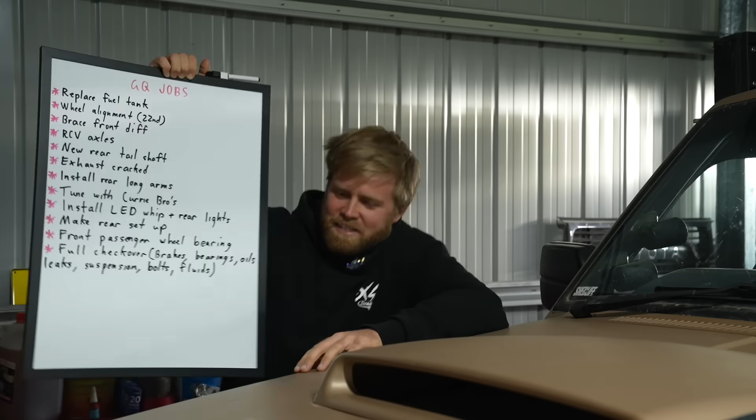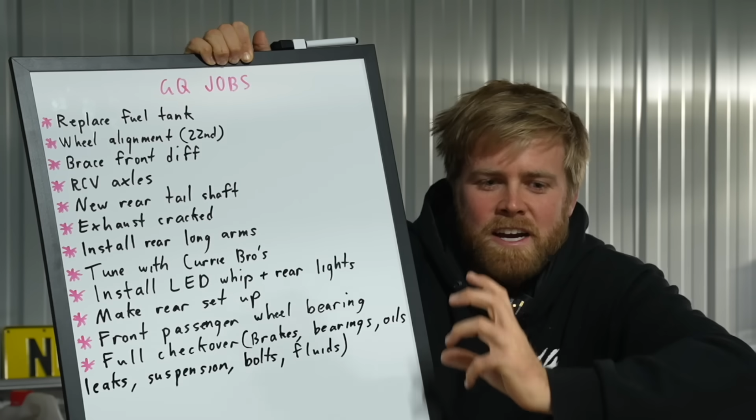We're taking this vehicle to Cape York, the top of Australia. It's maybe about an 8,000 kilometre round trip. We've got a lot of work to do to get this thing ready, so we've got ourselves a big list here. Some of it is fixing from our previous adventure, like a busted rear fuel tank and a busted rear tail shaft. It requires a fair bit of servicing. And then we're doing some really exciting new mods as we're always improving and making this thing better, more capable, four-wheel drive for adventure. So let's jump into it.

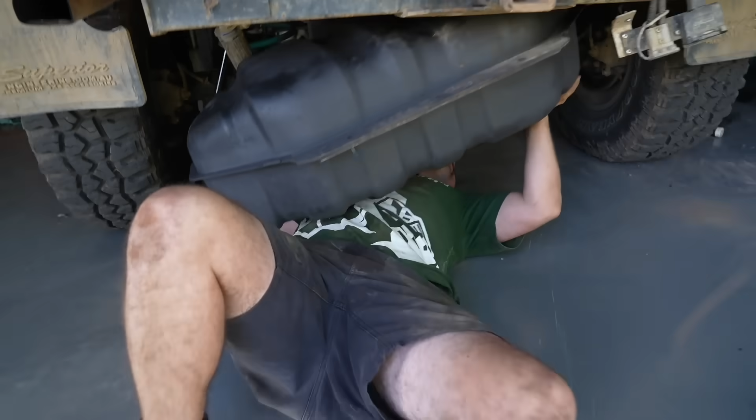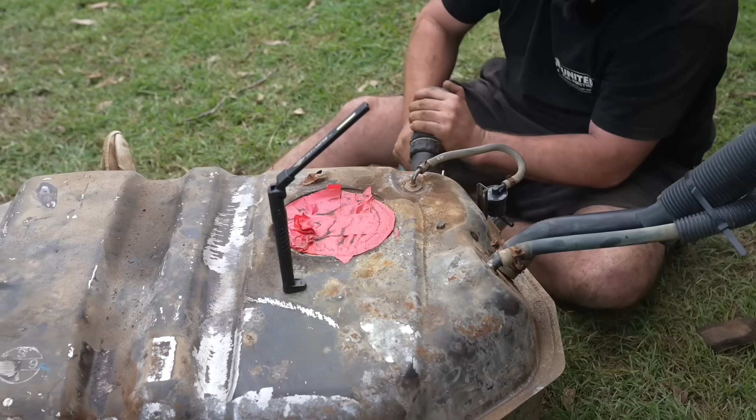First job we're doing, top of the list, is this leaking fuel tank. This actually started on our Central Australia trip, maybe about 9-10 months ago now. We said, look, we really need to get this fixed because it keeps reoccurring on trips - we keep patching it up and then the leak just gets bigger and blows itself out in a new hole. So I said, look, we've got to get a new tank. When I say new tank, I mean this rusty pile of shit that's there.

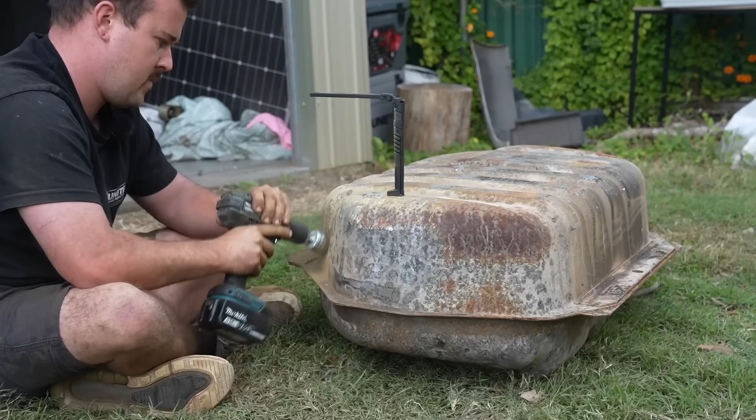This came out of that blue GU I had, which I got that spare TD42 out of. We pulled the tank out of that, but the tank's all pretty good - we checked all inside and it's beautiful inside. It's just got a bit of surface rust on the outside of it. So we're going to wire wheel it back, maybe put a bit of rust converter on it, paint it up, make it look nice, go to that little bit of effort, and then we'll whack that in the GQ and she'll have a new fuel tank.

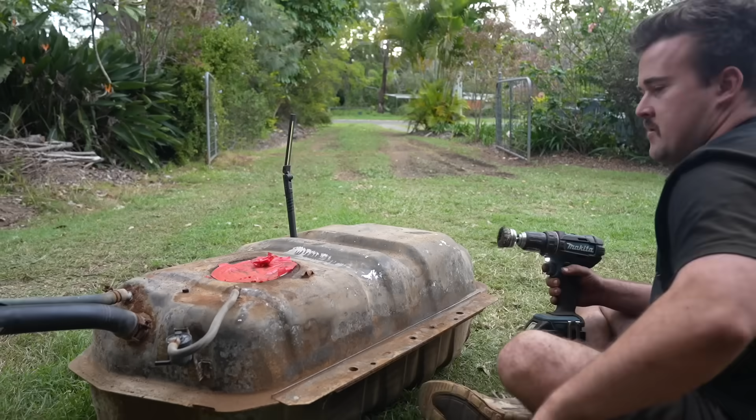We should actually say too, it's actually night time at the moment, but we got the Ultimate 9 torch out here, so it just lit up the whole neighbourhood. Yeah, mate, see how bright it is? It's not even on.

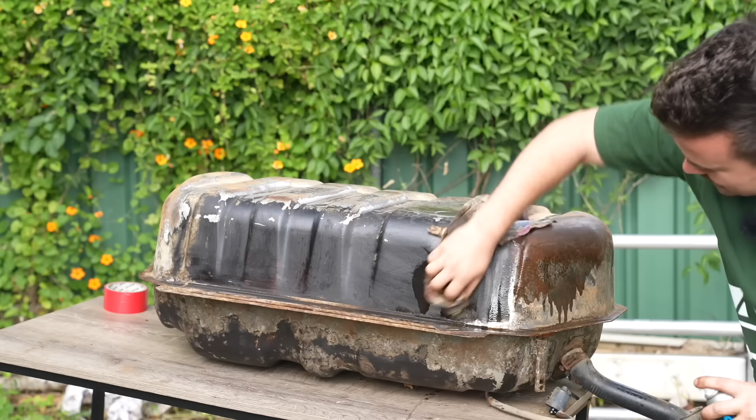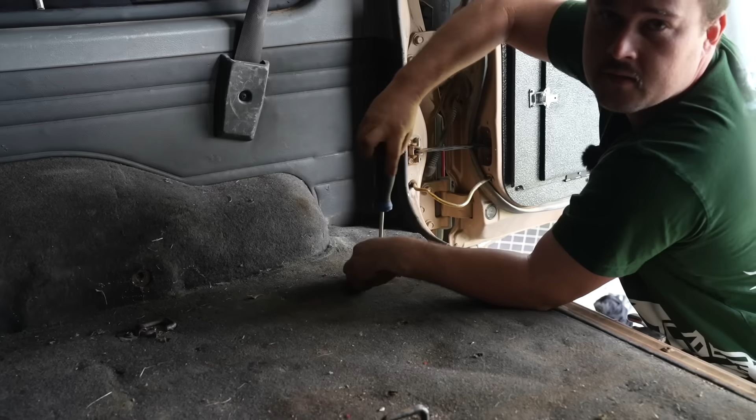The tank's painted. While we're waiting for it to dry, I'm going to rip up the back carpet, get into the top inspection hole, take the hoses off, and we'll drop the tank out. Nothing too complicated then. Nah, even you could do this.

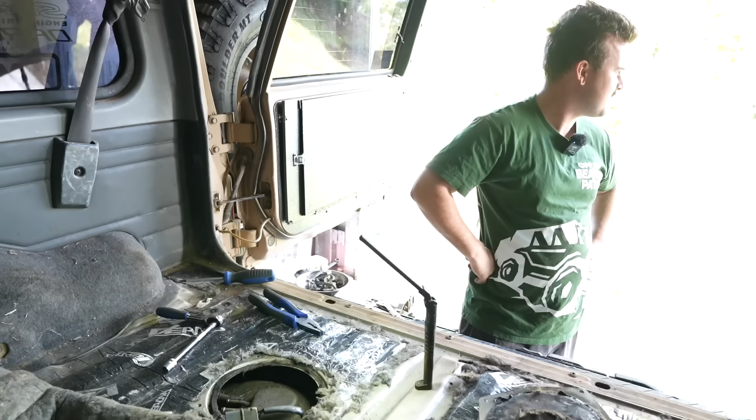Maybe, don't know. Look what I found under your carpet. This is my personal - no, yours, mate. Yeah, mate, it's just the usual, you're leaving your tools all over the countryside. Better than leaving your tools, isn't it? Yeah, well that's what you normally do. What do you reckon, full tank of diesel in there for you to sort out? Well, how much did you put in it today? I filled her up, mate. Maybe, so I seen the gauge. No, I don't know what - it's under a quarter.

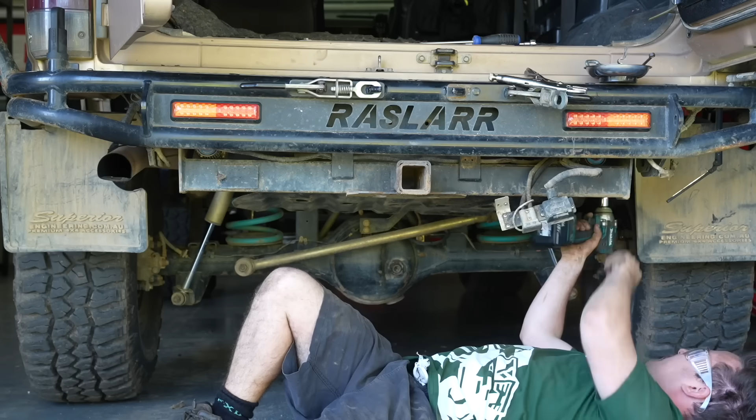Look at that, so that's the old fuel tank out. Now what? I'll probably change your sender thing, pull the hoses off it, and then I'll throw it outside to sit in the rain for the next 6 years. Perfect.

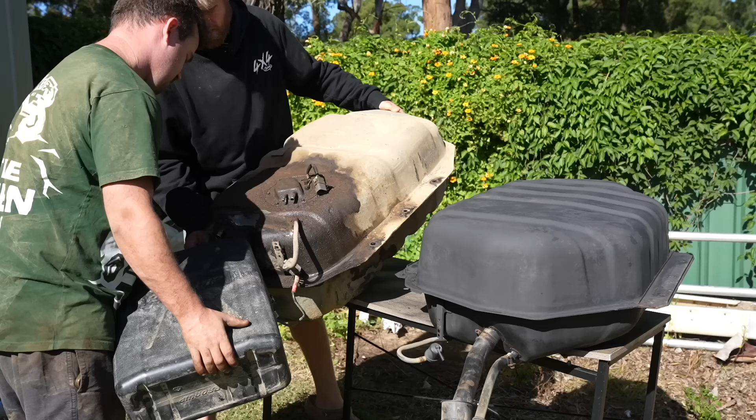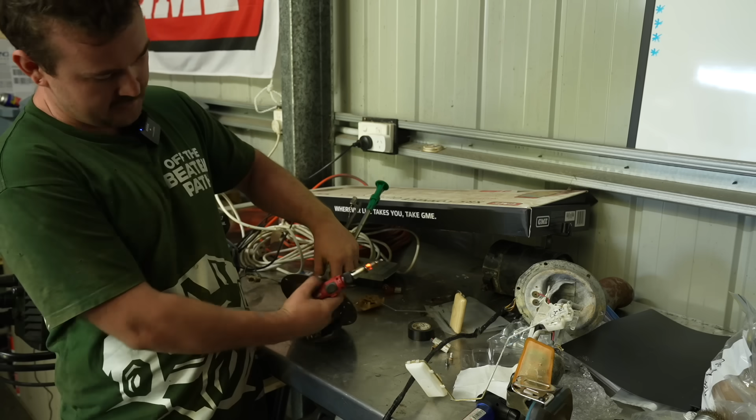What I'm doing here is I'm changing this fuel sender from this one, I know it's good, onto this one. It's got one screw and then this little sender comes off, but then the wire is soldered to a little thing, like a pass-through bulkhead. So I just melt the solder, pull the wire out, do the same for that, switch them and then re-solder it on.

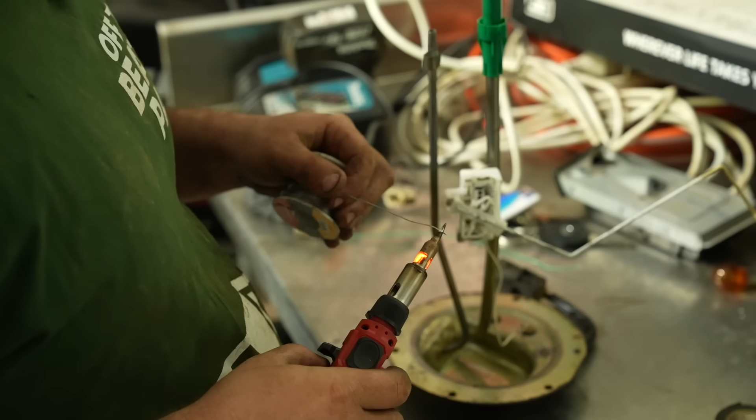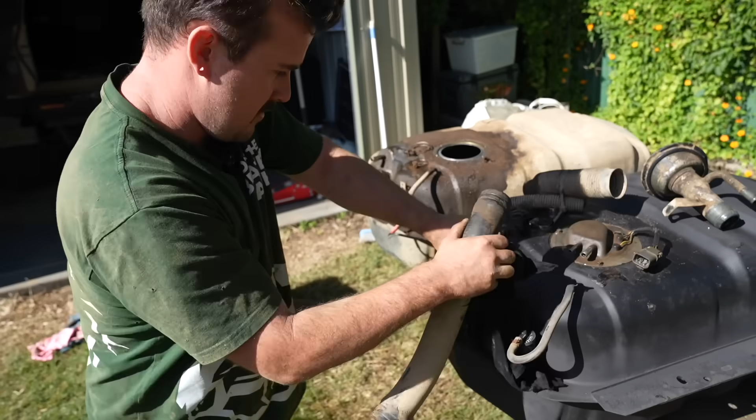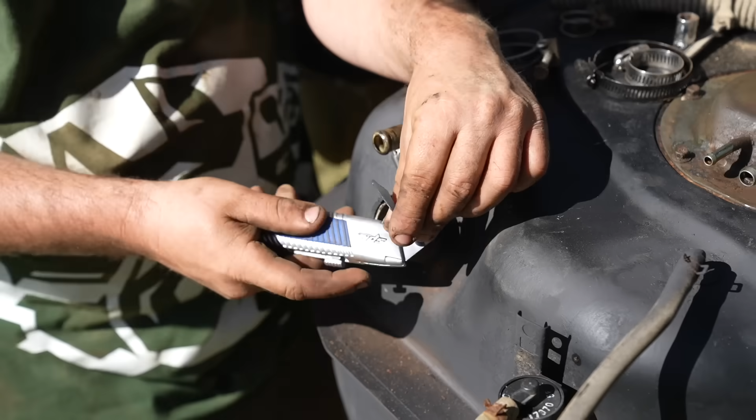We've got a slight problem - this is littler than that, but I had an idea. I thought, hey, what if I cut a piece of the little hose, slide it on, get him on there, and then big hose, boom - problem solved. I'll double clamp that to be sure, but that's a tight fit, a snug fit. We're not playing around, not today. So I reckon what I'll do is trim this around real flush so it's not gonna just hit it.

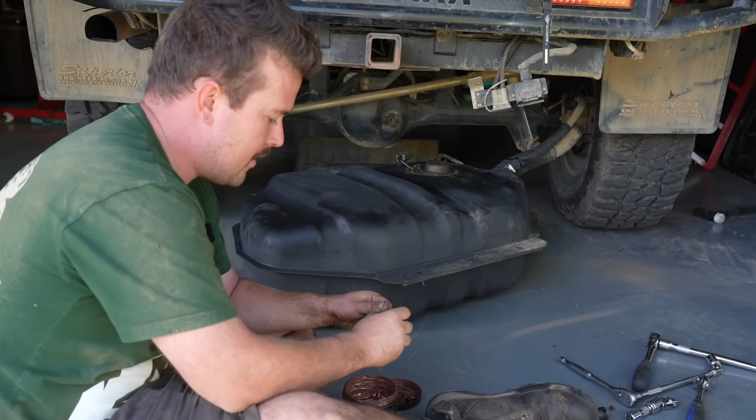What are we doing here, bud? This is called anti-seize, mate, copper ease. I don't want these, when it leaks again and you drive like a maniac and pick really bad lines, I don't want to be struggling with dirty bolts. Man, I can't wait to outdrive you on every Cape York track. Yeah, well that'll be your first. So I'd probably even let you have it.

So the new fuel tank's all set up, ready to go. We just got to lift her in now, re-bolt her up, and that'll be the fuel tank job done. Don't tell them it's that easy - slow down, everyone will be doing it themselves. You'll put mechanics out of business.

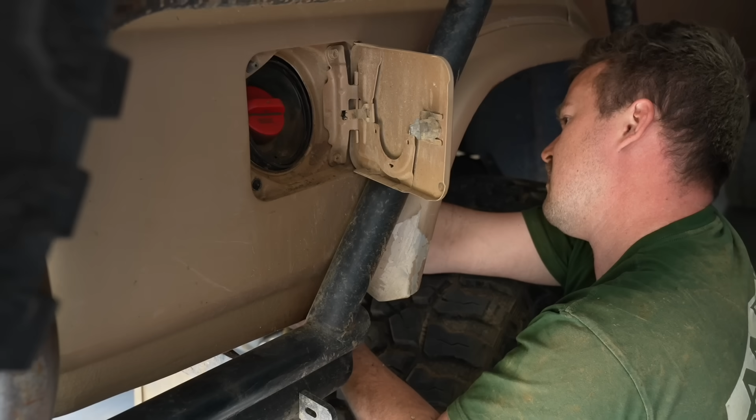Just putting the splash guard in. Mine doesn't even have this, mate. Yeah, my car's twice as good as yours.

Fuel tank's in. Going to turn the key on, make sure the gauge and everything works. Says we've got just under a quarter of a tank. It's probably about what we put in it, so. Beautiful.

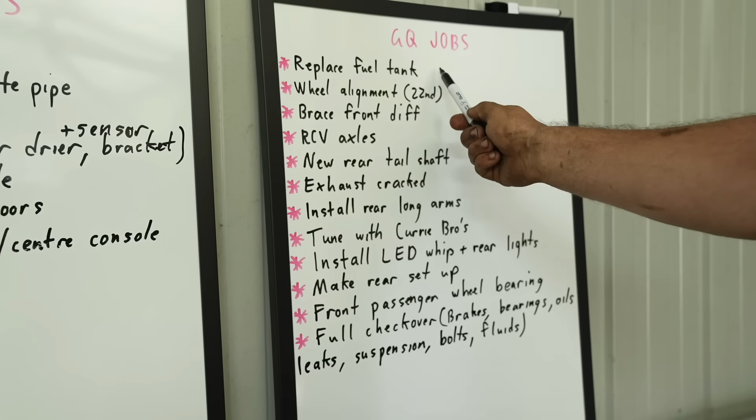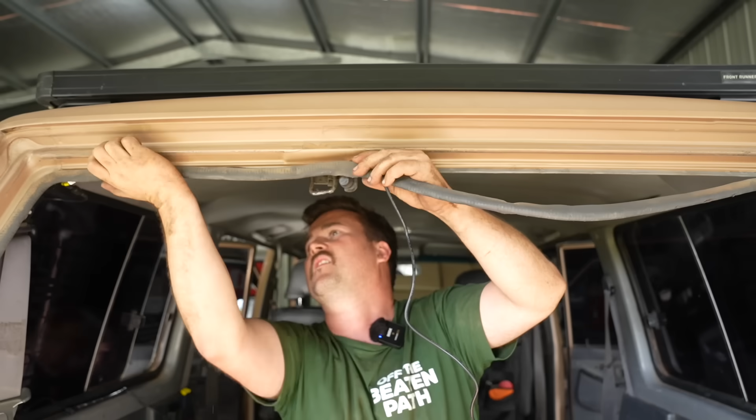With the fuel tank all done, the next job to quickly do and tick off the list was the new LED whip and interior lighting from EcoX Gear. I don't have any camp lighting inside the GQ and have been wanting some for a while. I've already got the speaker from EcoX Gear, so figured I'd just join their lighting up to it as well, and then it can all connect together in one system.

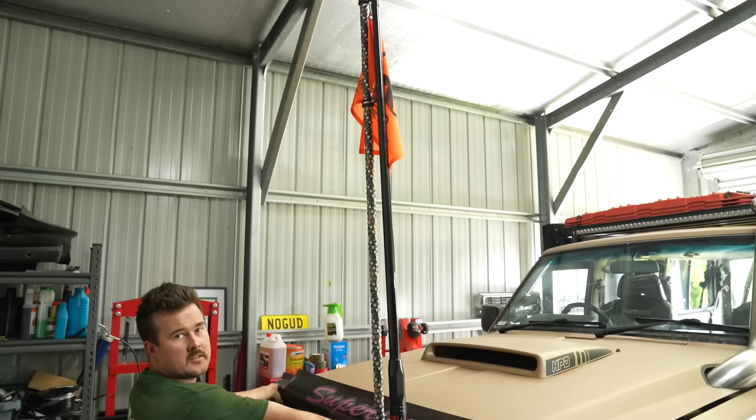That's her, mate, all installed. How'd it come out? Oh mate, it's my finest work. I've never seen something so good. A little slap together for Cape York lighting. So that's LED whip and rear lights done.

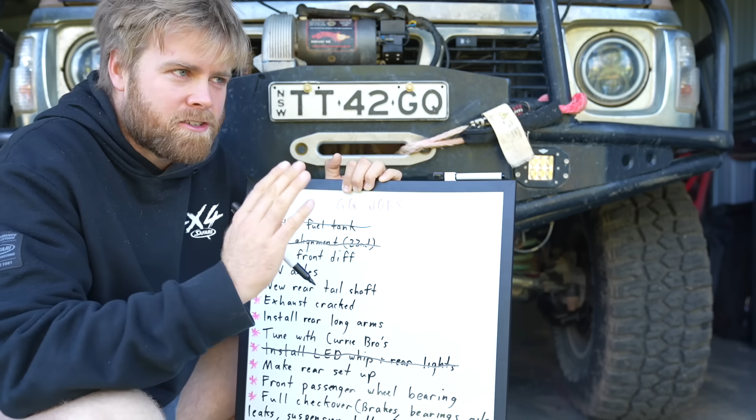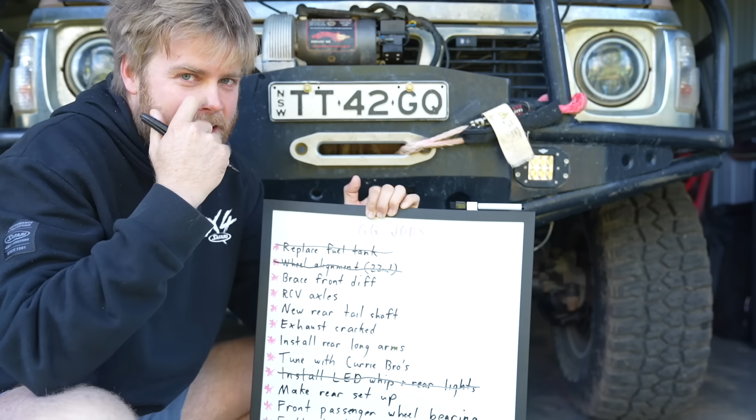This morning I've just taken the GQ down to get a wheel alignment, so that's been done. One of the things I wanted them to do was check the front diff is not bent, because once it's on the wheel alignment machine you can check your caster, your camber and stuff and make sure it's not doing anything weird. On the last trip, coming up out of Ali Bubba's cave, I tried to launch it up a step. It hit a double step at once and bounced the front end, big compression down, and busted out an axle seal. We were concerned that it maybe slightly bent the front diff, but it seems all good, which is good news.

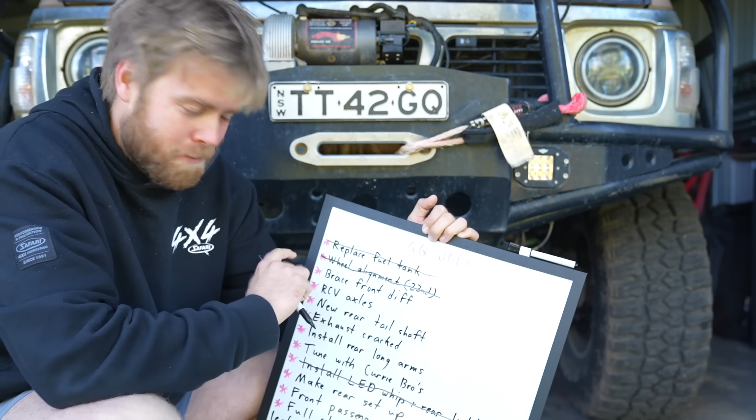So I don't have to get a new GU front diff, and that means we can now brace it, put my RCV axles in. Before we get into this front diff though, Berto's under there now pulling out the rear tail shaft, which got destroyed on the last trip, also on Ali Baba's cave track.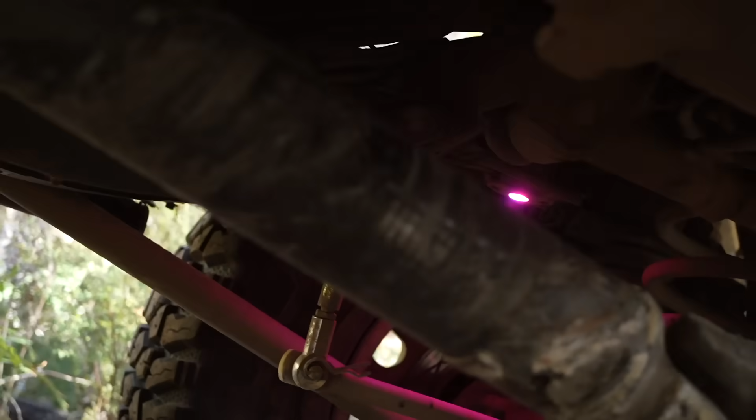As they were winching me up that big step, it grounded on the rock. You see us on the video, we thought it was just all scuffed up, but then we found it had quite a big dent in it, which is causing a wobble and vibration on the road at higher speed. So we're gonna get that one out and swap a different one in.

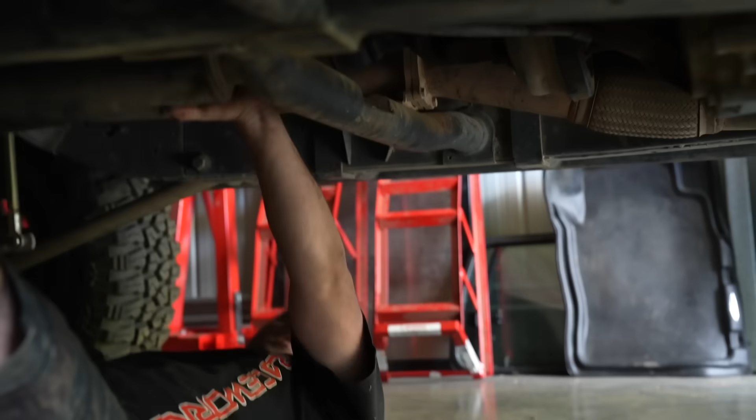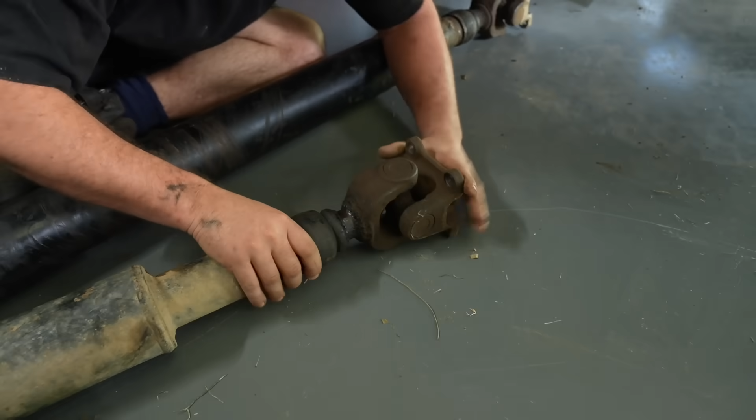There's a bit of a dent there. It's like flat. Yeah, okay. And then this joint here has got play in it. So it's probably a combination of both. There's a weird flat spot just there too, feel that. Yeah, okay, see how it feels low? It's like oval. Yeah, I'd say it's been squashed one too many times, mate.

Cop too many rocks, too much of your spotting, mate. Bit of better line choice from you, bud. Mate, I'm just gonna say on that step, I didn't say check my tail shaft, I said someone please check my rear diff. Well, be more specific, bud. Is it okay? Can you just throw a few rocks under those rear tyres as they climb? It won't bury that diff. Is that rear diff going to be good? Yeah, it should, it's starting to climb. Everyone said, yeah, your rear diff's good, and everyone just watched that tail shaft smash itself to pieces. No, you didn't have much choice. Once you were in that hole, you were...

Now look, where'd I get this one from? Ah, good bloke, I know. Birdo's part. Yeah mate, feel that. Good, mate, smooth as a daisy, but a couple scratches on stuff, she's feeling round. You give that a feel, bud. Nice big smooth shaft there.

While I've got this thing out, I might give it a fresh grease. I might put this in back to front so you've got your hits on the cross member, doesn't flex, mate. From factory, that end is at the diff. Yeah, and then this flipper. I'll put it back into factory specs, bud.

Mate, anything so you have a chance of keeping up with me on the tracks. I don't know if you've seen the last few episodes, but we've been getting smoked, brother. No doubt it, I don't know what channel you've been watching. Yeah, it's the Birdo channel, brother. Get on it. Mate, everyone's been messaging me saying how much I've been smoking you, so. Yeah, what, you getting your mum to get all her friends to message you or something? No, yours. Mate, I don't even know why you try with me, eh? Your brain's like the speed of dial-up from 1991, buddy.